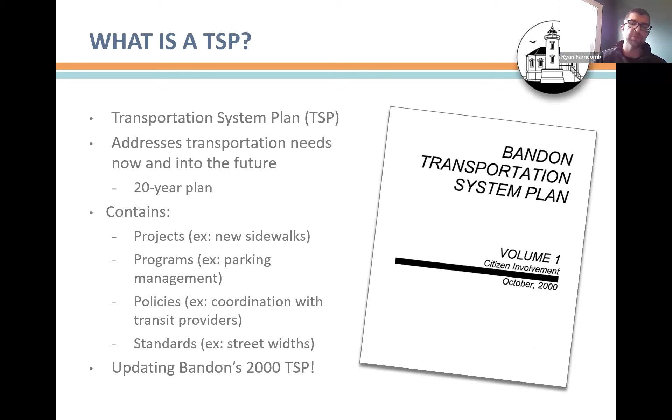TSPs look at all modes of transportation, and a transportation mode is just a way of getting around. So when we look at the transportation system plan, we're considering people walking, people driving, people riding a bike, using the bus, freight, and deliveries.

As part of this transportation system plan effort, we know there are a few things top of mind for the community. One is US 101 and balancing the needs of everybody who uses that facility, developing streets that work for everybody no matter how they want to get around, making sure we are considering and addressing tourism travel impacts, and also looking at how we can create new viable connections and increase street connectivity in and through town.

The TSPs contain a number of different pieces. One is goals and objectives, which I'm going to talk about here in a second. Those goals and objectives help us guide the process throughout, and help us select and evaluate projects and programs for the TSP update, in addition to feedback from you and from the public at large.

We'll also look at funding as part of the transportation system plan. What is the local funding picture? What might it be in the future? And what is the gap in terms of transportation funding needs, and how might we solve that?

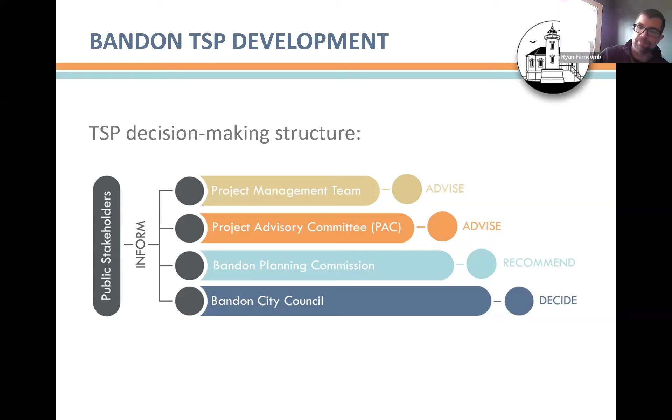So we are a third of the way through the TSP process. We've gotten to the point where we've established goals and objectives. We have got a good handle on existing and future conditions analysis, and this conversation today will help us flesh out that further. But the next really key piece of the project that will start here soon is looking at improvements—solutions, construction projects, programs, things like that that address those issues and needs we're going to talk about today.

The goal is to have this whole process wrapped up a little bit later in the year. Once we talk about improvements, we'll have another touch point with the public to review those improvements and determine what is preferred and should be included in the TSP. And then we'll draft that updated TSP for review and adoption this fall. We'll have several more touch points with the Planning Commission and the Council along the way as well.

Before I talk about the goals, are there any questions or comments about the overall process or what TSPs are about? I don't think there are any questions. Thanks, Dan.

Okay, I won't read these out loud to you word for word, but I did want to show these goals. There are 5 different goals, and along with these goals, we've also developed some evaluation criteria. These are important because they guide us throughout the TSP process, and especially in terms of selecting projects and programs to address the issues and needs we identify. I'll pause for just a second so you can digest them.

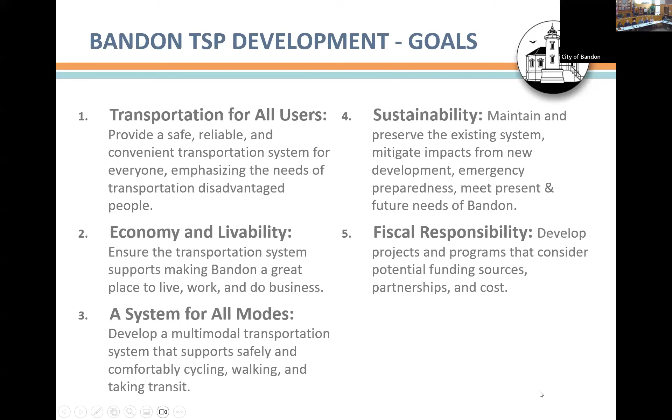Okay, Dana, let me know if there's any comments or questions about the goals. I don't think there are any questions or comments, but I'm looking around in case anyone has anything—chime in. Nothing. All right, Emily, I think I'm gonna turn it over to you here.

Sounds good. Hi, everyone. As Ryan mentioned, I'm Emily Mannisto Myers. I'm assisting the TSP development effort for this project. So just this month, we wrapped up public outreach milestone number 1. This was kind of the first step in sharing what we've learned so far with the public.

We conducted those project advisory committee meetings—the first was in June, the second was in November. We also completed some community representative interviews. We actually talked on the phone to some folks to confirm that we were looking at the right issues and needs and focusing on the important aspects of getting around town in Bandon.

And then we had an online open house—can you click to the next slide, please—which we had open from November 1st and just closed, I think, last week. This was a really great way to hear from people in Bandon about what their priorities are, what they see as being the most important issues in town.

People really seem to like the comment map. It was really interesting to be able to click on these little points and see exactly locations that people felt needed to have some improvement or just to look at more critically. Next slide.

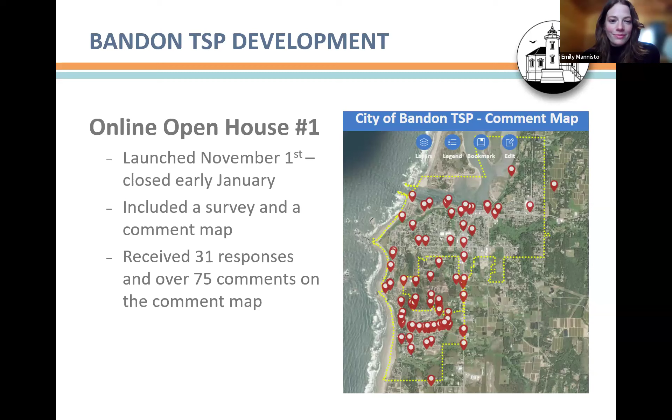Some of the common themes from all of that outreach, from the PAC meetings, the open house, and the community representative interviews, were definitely a focus on safety on US 101. That was pretty much first and foremost on people's minds. Walking and biking connections, how to get around town safely and more easily. Multimodal conflicts focused on US 101, but also expanded to look at Beach Loop Drive, which came up a lot, and Seabird. Those three roadways with multimodal conflicts were definitely common themes.

People also wanted increased transportation options. Along with walking and biking, people vocalized the desire to have better connections, both within the city, bringing up that trolley that used to run in Bandon, and also intercity connections. A lot of people brought up getting to medical appointments out of town, along with just more information about getting around and different options. Also, tourism season, people were concerned about traffic and parking. This came up both in the conversations we had in that comment map, and also in responses to survey questions.

For existing conditions, besides talking to people, we actually did some in-depth analysis about what's going on with the transportation system in Bandon. First off, the street network, as you all may know, there's a limited number of north, south, and east-west connections, especially when we look at the donut hole. So we're focusing on potential ways to address connectedness and roadway connections in this area.

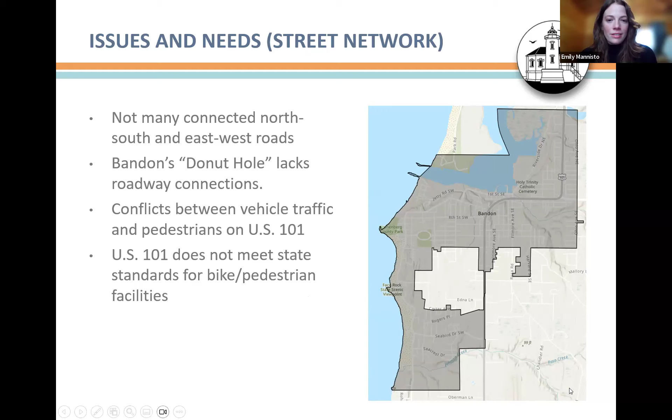Ryan, I think you're going to tackle this one. So a little bit more about 101 and some of the things we're considering.

One thing I want to note here is that US 101 is a reduction review route. What that means in a nutshell is that it's an important route for freight vehicles. Because it's a reduction review route, we have to be very careful with actions or improvements to US 101 that might affect or alter the freight carrying capacity of the roadway. For example, a consideration might be if we were looking at median islands or refuge islands for new pedestrian crossings, that might trigger some discussion about how that does or does not affect the ability of freight to move in the corridor. I mention this because it's an important consideration for us as we think about the future of 101.

There's also congestion we've heard about from turning freight trucks on US 101. And one other note related to freight specifically is that we've heard from folks, especially in downtown Old Town, talk about a lack of truck or freight loading zones, where vehicles are sometimes blocking the road, things like that.

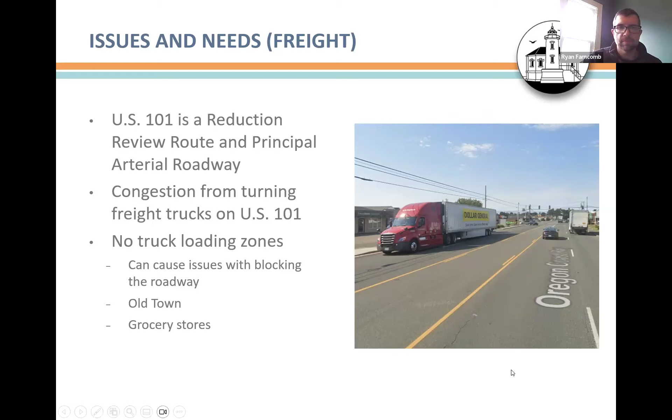So issues and needs, safety - there's a lot on US 101 on this page, but this is intended to be more about safety broadly. It's worth noting that most of the crashes found in the community are along US 101, and 11th Street to Face Rock Creamery has the highest number of crashes.

There's a couple of locations where crash rates exceed what would be expected for that type of intersection - Beach Loop at Seabird, and the intersection on 101 with Oregon 42S. Those locations in particular are places where we definitely want to look hard at safety solutions. As we've already noted, it can be stressful for people to walk across US 101, and there's a significant distance in some places between those marked or improved crossings.

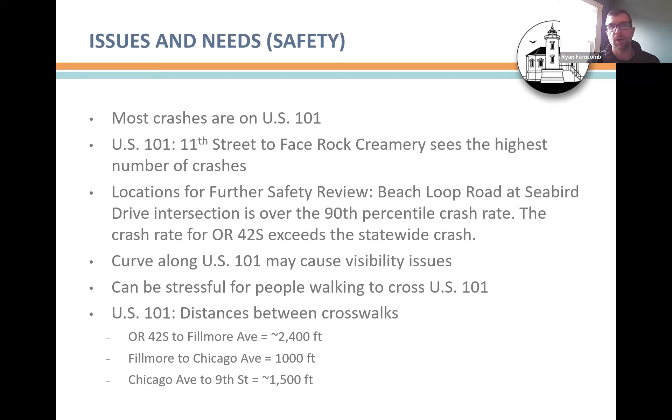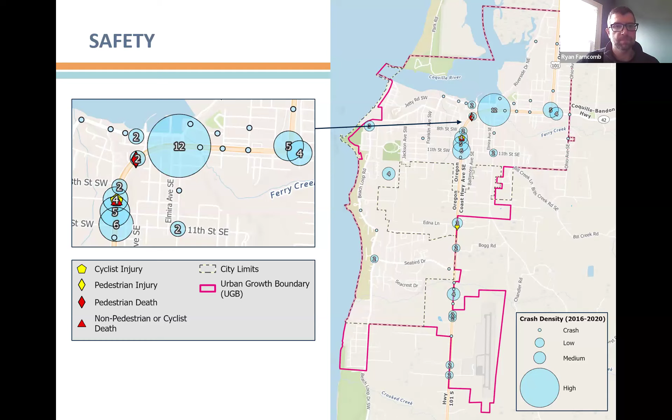In terms of traffic, one thing we've heard from everybody we've talked to on the project is that during high tourist season there are concerns about congestion and parking in the community. When we look at how US 101 intersections are performing relative to state standards, all of the intersections actually perform within acceptable limits of congestion. That doesn't mean there aren't times of year where things get very busy and congested.

The other side of that issue is parking. Again, we've heard that in the summer, parking can be an issue, especially in Old Town and along Beach Loop Road. We've heard about a lack of signage, so potential confusion from people trying to find parking - where is the parking, how do I get to it? And then also a lack of comfortable crossings near some parking lots.

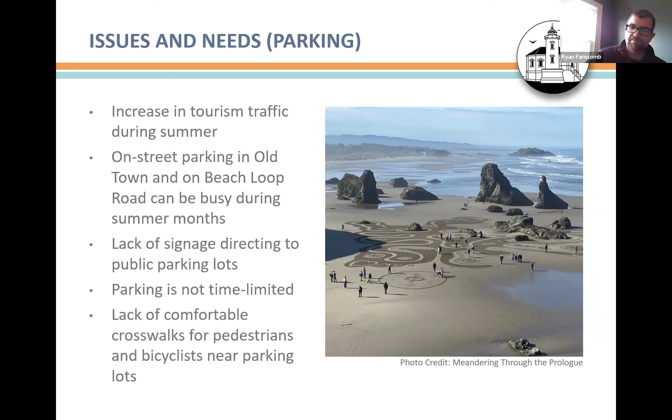Emily, is this back to you or me? I can't see the notes. I think so. Yeah, I can take it from here.

Going back to what we heard from people when we interviewed, a lot of folks generally stated that Bandon is pretty walkable. The main thing that came up was wanting safer crossings for both people walking and biking across US 101. There were also some sidewalk gaps that we saw from doing our analysis and also from talking to folks. Beach Loop Road was one that was really important.

11th Street has sidewalks on one side, but some people expressed that it would be nice to have sidewalks on both sides. 8th Street near the schools, Oregon Ave, providing a connection between the park and schools area, connecting up to Old Town without having to walk on US 101, and then Jetty Road out to the park. There's also not much in the way of street lighting outside of Old Town, so people expressed that they would feel more comfortable walking at night if there was better street lighting provided.

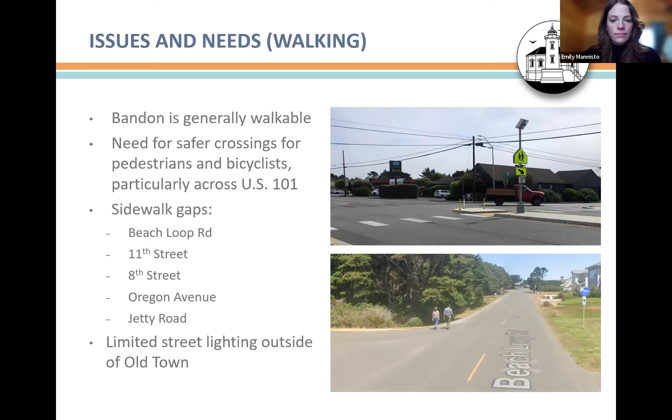Another element was the bike network. Most roads in Bandon don't have bike facilities, so it's really just that one stretch along US 101. We looked at different possibilities for adding bike lanes, but we also looked at some streets in Bandon being candidates for shared bikeways or neighborhood greenways - quieter streets that may have some traffic and some other improvements to make it comfortable for people of all ages and abilities to bike on.

This stemmed from a desire expressed by people wanting a more interconnected bicycle network, not just on US 101, but through and between Bandon's neighborhoods, with bikeways connecting to key destinations around town. Another thing to mention is that the transportation planning rule does require transportation facilities for biking and pedestrians on collectors, which US 101 is. So we are going to be taking a look at bicycle facilities on US 101.

Just a quick note, it's collectors and arterials - US 101 is an arterial.

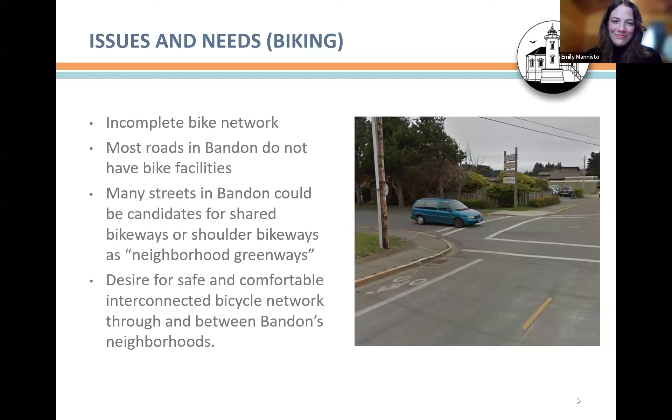For public transportation, the Bandon Dial-A-Bus - the people who use it really like it, but a lot of folks expressed that they don't really know much about the Dial-A-Bus. There's not as much information as they felt like there could be. A lot of people don't know that Dial-A-Bus exists or how to use it. It also requires riders to plan ahead, scheduling ahead of time, which isn't always easiest for people to do.

So people wanted a way to get around town in a smaller, local way. They expressed really enjoying the tourist trolley or a local shuttle to key destinations. We also talked to people who wanted better intercity public transportation. Medical appointments was something that came up a few times. And some people talked about how for those living and working in Bandon, or working outside of the city, it would be great if they didn't have to drive every time coming in for work.

And then the one bus stop that's at Rays that has the intercity transit connection is largely unmarked - I think it's just a sign and there's no seating there. So looking at improving the actual bus stop that's there.

So future conditions is a way for the project team to look at what the city might look like in the future if it's accounting for completed or planned transportation improvements, ones that have a committed funding source. So looking at what the transportation system would look like in 2045 if only the projects that are planned and funded are completed. Since there were no planned and funded changes to the roadway capacity or traffic patterns, we didn't make any changes to the roadway network in our traffic modeling. From the results, we saw that intersections continue to perform within the mobility targets we looked at in the existing conditions, although during high tourism seasons, congestion could still be a problem.

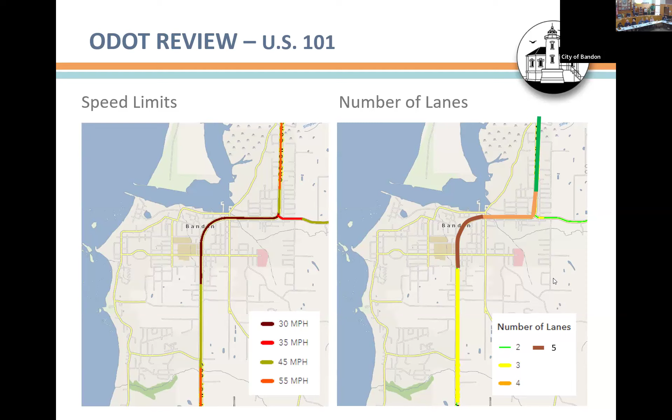So any questions on that? We know that there's a lot of issues with pedestrians crossing.

As I was telling the project management team, we don't typically fund transportation system plans for smaller communities like Bandon. But we've heard from your citizens and from you about the pedestrian issues and some of the crossings. There was a fatality a few years ago. And ODOT had came in to talk to the city council about reducing lane widths, and you know what, we hadn't really studied it as much as we should have. So for those reasons, we wanted to take a step back and take a look at what are the issues and what is it that you as a community want to accomplish.

We recognize that yes, we have freight concerns, but you also have concerns on how people move around your town in terms of bicycling and walking and getting safely across the highway. So how do we accomplish that? That's what this is, an opportunity to take a look at what are those alternatives, how do we do that, how do we best manage the roadway that not only meets our needs, but meets your needs.

On top of that, you have a tourism aspect. It gets quite busy here in the summertime as people come to your town and enjoy it, but how do they get around? This is that opportunity to take a look at that and figure out what's going to work for everyone. I used to always say the engineering solution is not always the best solution, it's the one we all come to that we can all come together on. So we take a look at a diverse group of stakeholders and people that are vested in how you move around this town, and that's what we want to hear. We want to work with that to come up with a solution that you all can agree to.

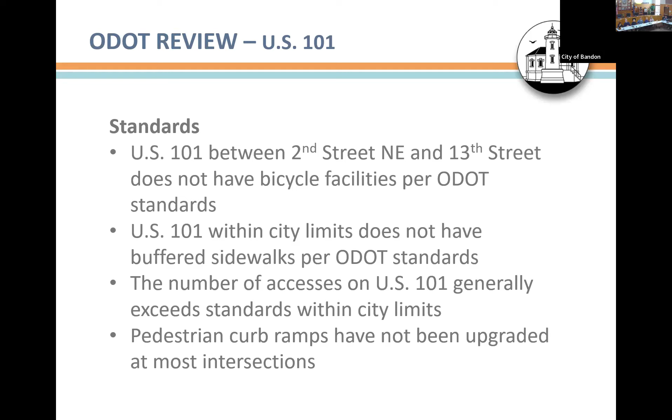The Fillmore traffic light - the fire chief was down there one day at the scene of an accident, and he and I were talking, and he said this is absolutely the most dangerous intersection anywhere in Bandon, anywhere near. It's so confusing because people think they have a green light and they don't, and there's many accidents down there. And another problem, as you're coming down Fillmore, there's this strange grid that makes it look like it's a 4-lane. There's room for 4-lane so that the person that's going to go up the hill can pull over like that instead of getting into this traffic.

He can be over here, but legally they can't. And I watched an accident where a woman pulled over there, and then this other woman who appeared to be going that way or that way decided she was going to turn. Actually, she was in the right. But the way it's configured down there, it's extremely dangerous, because people do and should be able to pull up, because then they can go and they don't have to be part of the congestion - they can go when it's clear. So I think somehow or another - I believe Timmy and I talked about it - I don't know if it's an ODOT issue because it's on Fillmore, but it's definitely impacting that traffic light.

We probably manage the intersection anyway because of the traffic signal light, and you're right, Mayor. Just looking at the crash rates and the crashes here, Fillmore is probably your biggest, has the most crashes there. So definitely something that we want to look at as part of this TSP and figure out what we need to do to make it work right.